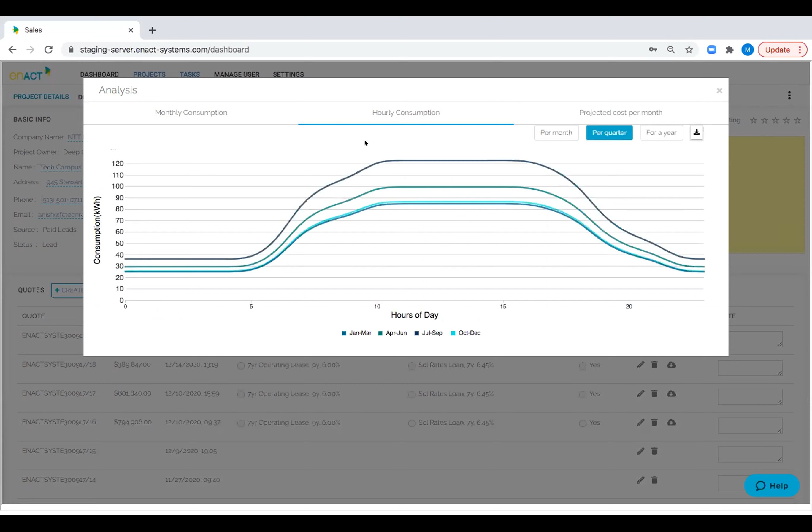You're able to look at seasonal load profiles based on a month or season or the average profile throughout the year. So we're really helping customers to visualize customer loads and different generation profiles so that you can optimize designs for either time of use offset, battery backup, solar self-consumption, or other storage strategies.

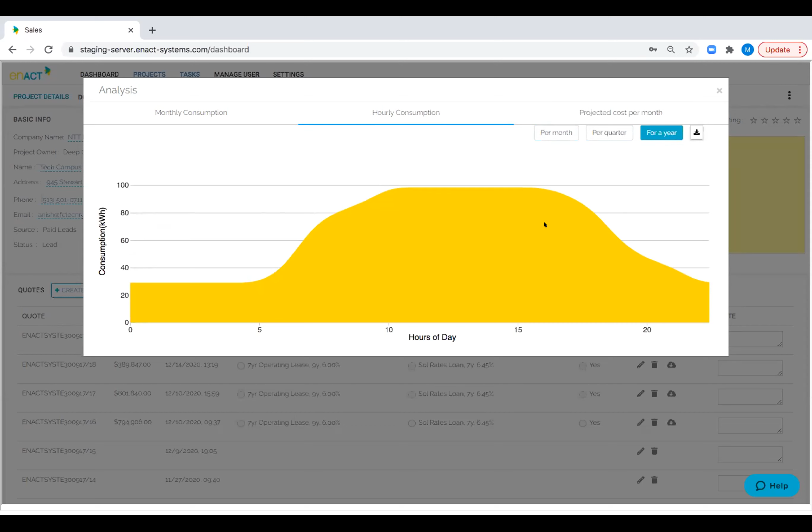We'll just go into a sample design here to view the system layout capabilities. And as was the case with our San Diego project that we worked on with Spencer and Centrica Business Solutions, this system was originally designed from our sales channel within Enact to provide an initial savings analysis and generation analysis for a PV system on a hotel. And those projections were used to create a bidding analysis with multiple contractors that were Enact partners.

And in that case, Centrica was able to use that design that ended up working perfectly. As we know, there's many different design platforms out there, and we were able to prove that within just a 2-minute design, you're able to accurately project system sizing, savings analysis, and generation.

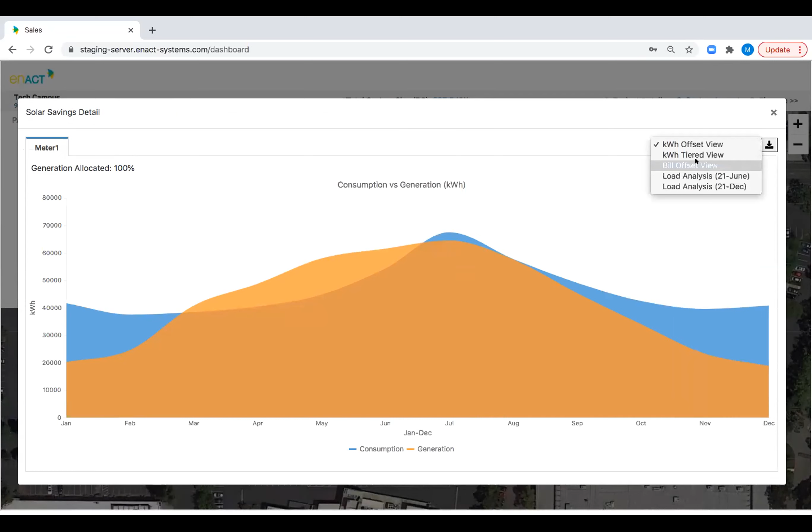So here we can see the annual kilowatt hour offset by month, and we can see the monthly pre and post solar bills.

And we can see a summer and winter load analysis to see the actual generation profile of solar versus your building's consumption, and view the actual charge and discharge of your energy storage system. Again, this will calculate any time of use savings, and we'll be releasing new strategies and features to optimize energy storage and solar design for different control strategies.

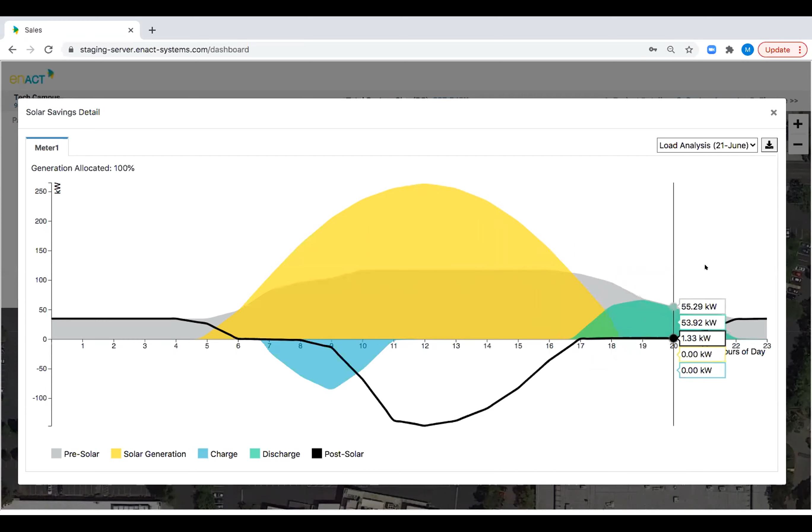Once you have your design locked in, we also have a powerful finance engine where, again, you can automatically price your system based on component and labor pricing set by your administrator. You can also compare multiple finance options that your company may offer, whether it be loan, lease, PPA, or PACE.

You can add different incentives and apply different tax strategies for depreciation, or of course model your ITC if you're in the US, and select from multiple customized proposal formats.

So that's a quick run through of just the project origination, design, and financial analysis that can all be done through Enact. And once you have your proposal to present to a customer, which we'll bring up here.

You can have customized and branded proposals that have all of the system savings analysis, pictures, system specs, financial metrics, and system performance. Again, these can all be customized and branded to your company. In our case, this is just a branded Enact proposal that we use for our corporate clients.

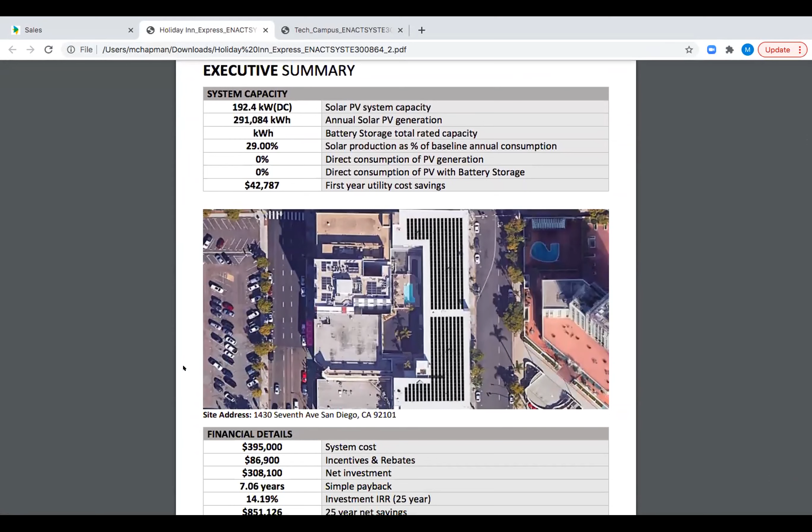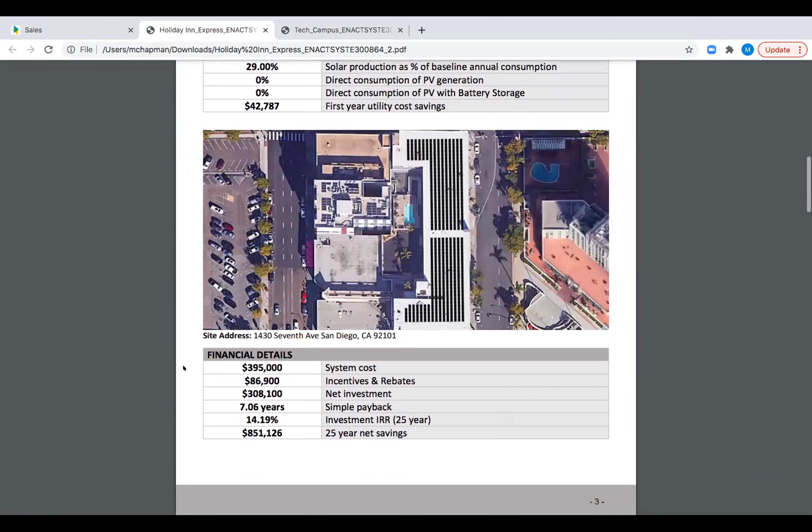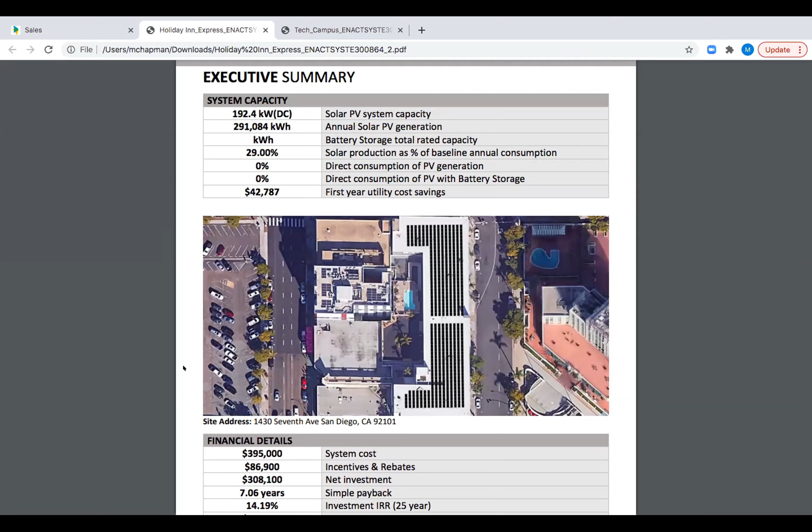So we did a great job working with Mark and the Enact team to really make sure that the model was accurate. The Enact platform did a great job of predicting what we confirmed in the field. Ultimately the project was about 180 to 185 kilowatt rooftop system, and a lot of the Enact platform helped dive into and accurately predict the final system size that was ultimately installed. Mark's team also did a great job of getting us all the interval data, all the utility analysis, everything that we would have done on our own was kind of all driven off of the Enact analysis. That really helped us streamline everything to get this into contract ultimately, and deliver a great project to the customer.

So that's kind of how the process went. Our team handled all of the EPC work from contract signing all the way through permission to operate down in SDG&E, which was the utility. We worked with Enact, and the customer used Enact to track the opportunity and construction on how things were moving forward. Overall, I think our team was very happy working with Enact and making sure that what was projected on the platform was what was ultimately delivered to the Holiday Inn Express there in San Diego. So we had a good experience, and we're looking forward to doing more projects with Enact as a developer EPC.